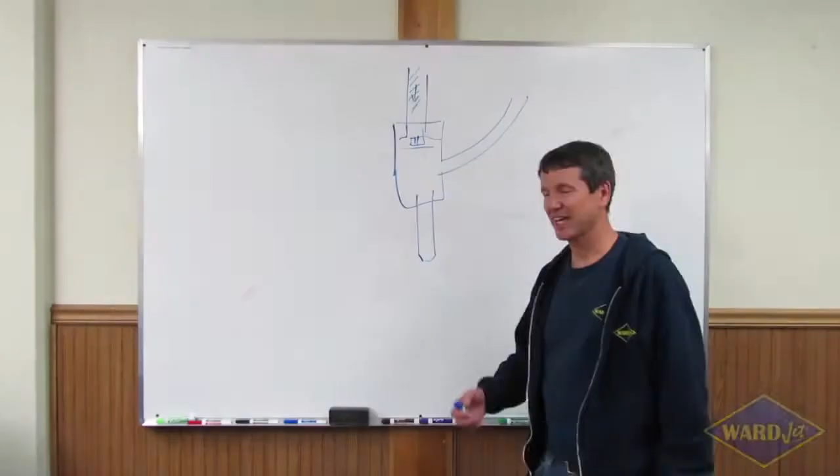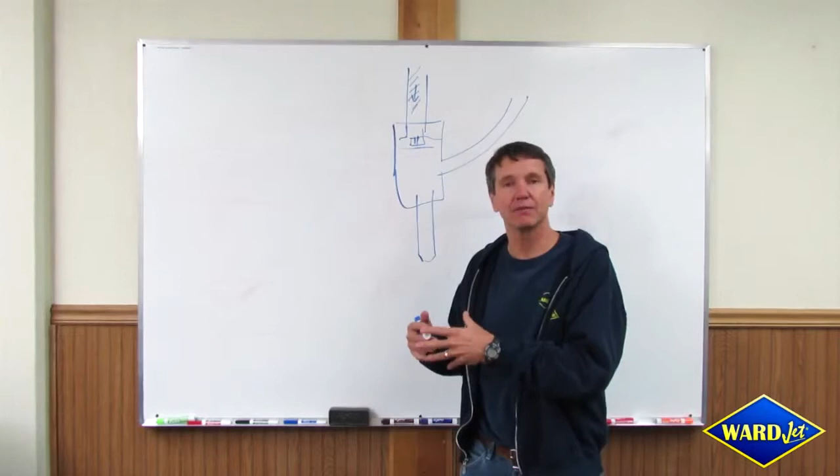Okay, we're going to talk a little bit more about the mechanism of how the water jet cutting head works. As long as you understand that, you'll hopefully have a better idea and feel for what's going on while you pierce, and why you're getting blowouts, how to try to address them, and what could be the cause.

Okay, rough picture. Here's your cutting head, your nozzle. We've got the abrasive coming in, we've got the high pressure water coming down here. The process is the water comes through, comes up against an orifice, and comes out as a stream of water that travels straight out the nozzle, at 2200 miles an hour.

Depending on what style cutting head you have, there might be some kind of wear chamber in here, so that you wear away the chamber as opposed to wearing away the whole body. All the water jet cutting heads typically have a wear chamber inside them, a wear insert.

You've got your abrasive coming down here, and the way it gets drawn in is a process. The first thing is you turn your water on. The water comes up against the orifice, it's forced through the orifice at 2200 miles an hour and goes shooting out the nozzle. That's your pure water only.

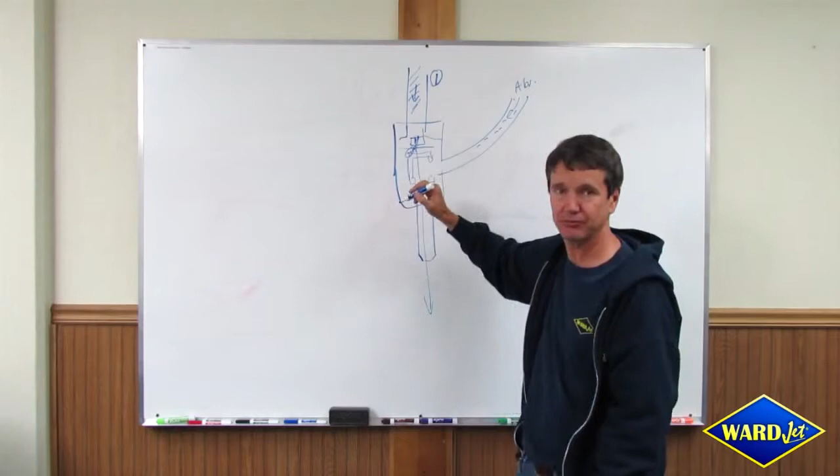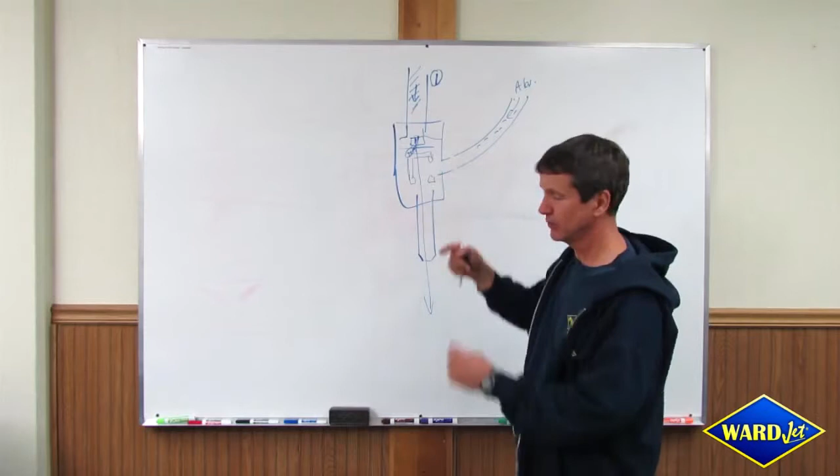As it comes out here, by the Venturi effect, it creates a vacuum. So if you took the abrasive tube off and put your finger on here, you should feel a strong pull of the vacuum trying to suck your finger, and when you take it off there'll be a little white mark there. So you can always test the quality of your orifice and nozzle by simply putting your finger on there.

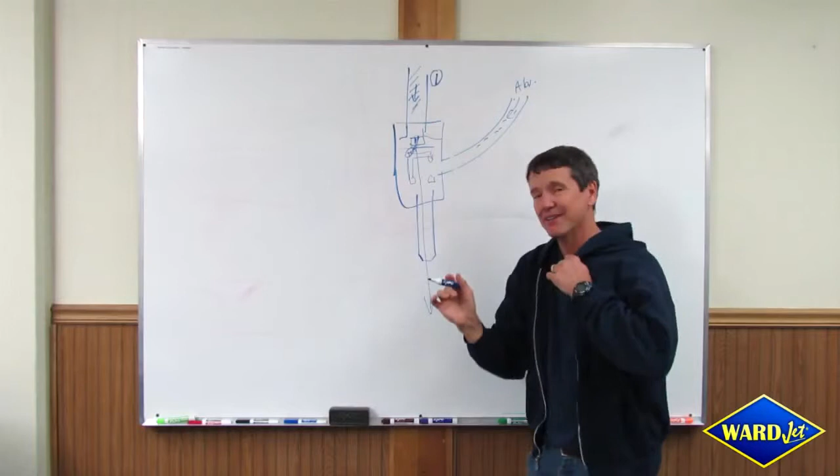We rely on that vacuum to efficiently remove the abrasive and draw it into the stream, mix it up, and take it out through the cutting head.

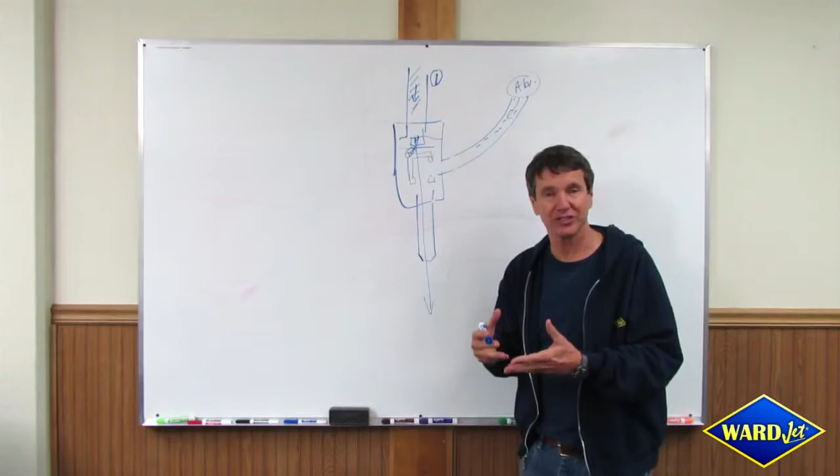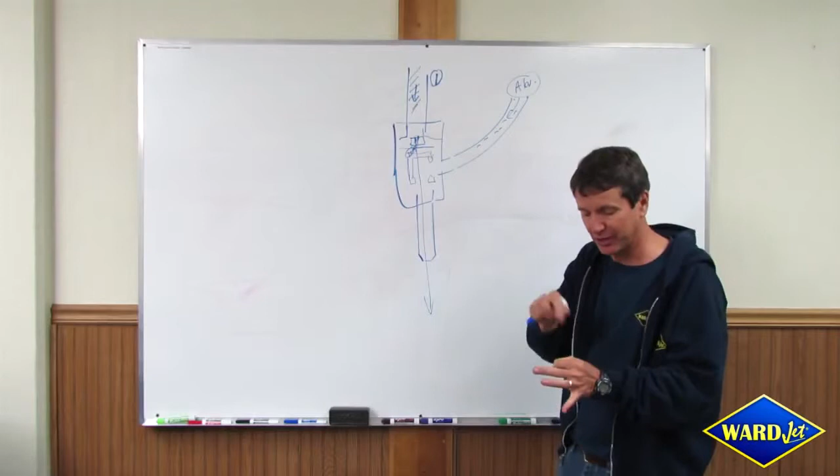Let's just flip to the abrasive side. The abrasive is typically dropped into this tube by gravity or some form. Gravity is the most consistent, but even water jets have different style mini hoppers, some with just a valve that opens, and depending on the opening and aperture you have, more or less abrasive falls out and drops into a tube.

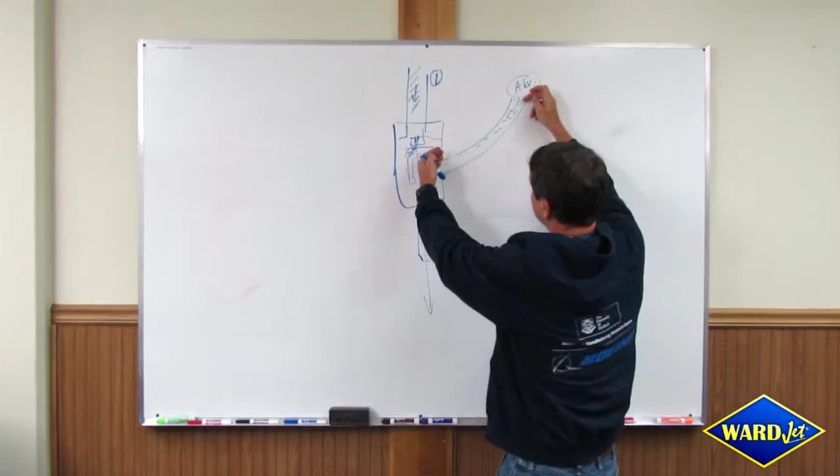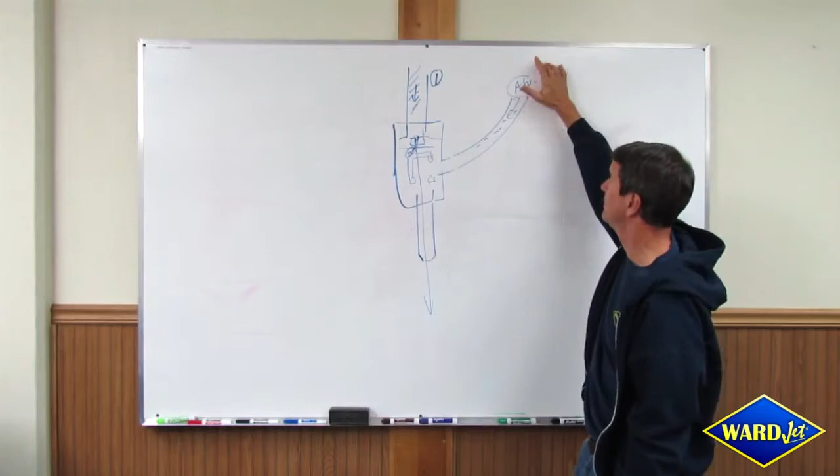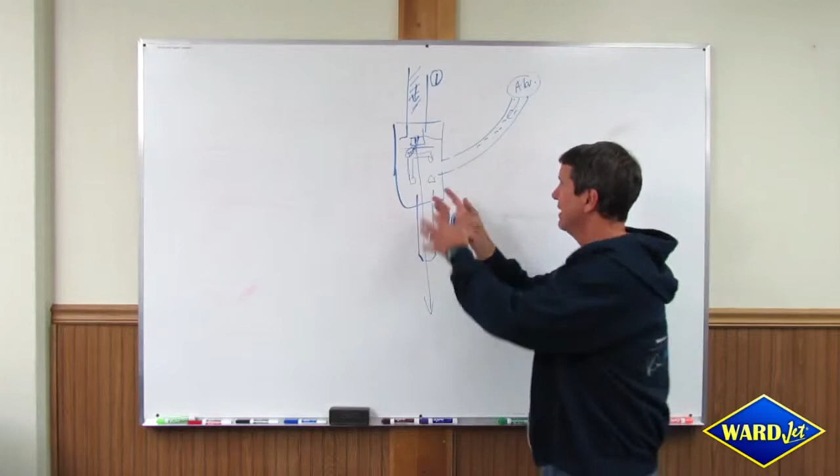It's going to run down this tube, encouraged by the vacuum that is drawing it away. But the vacuum should only draw and consume as much abrasive as you're dropping in. If you put too much abrasive in here, the water is not going to be able to take all the abrasive away and absorb it into the stream, and as a result the abrasive starts to clog back up here.

If you don't have enough abrasive coming down, then of course you're not cutting at maximum power. Your cutting power with abrasive water jet cutting is determined by having the right amount of abrasive.

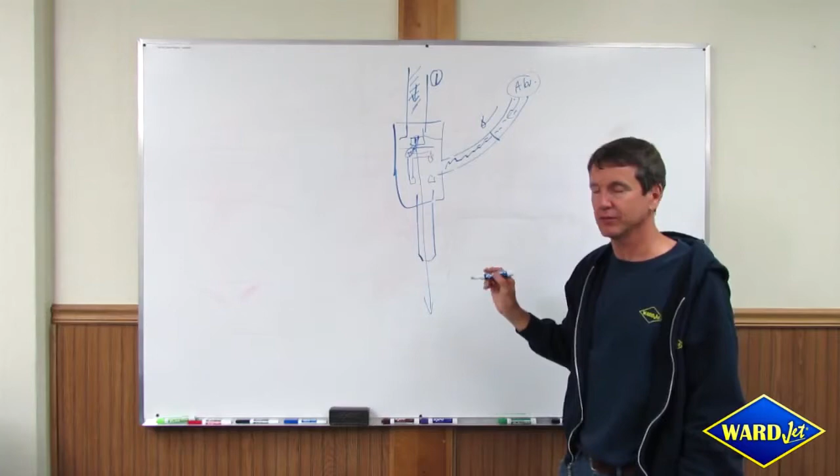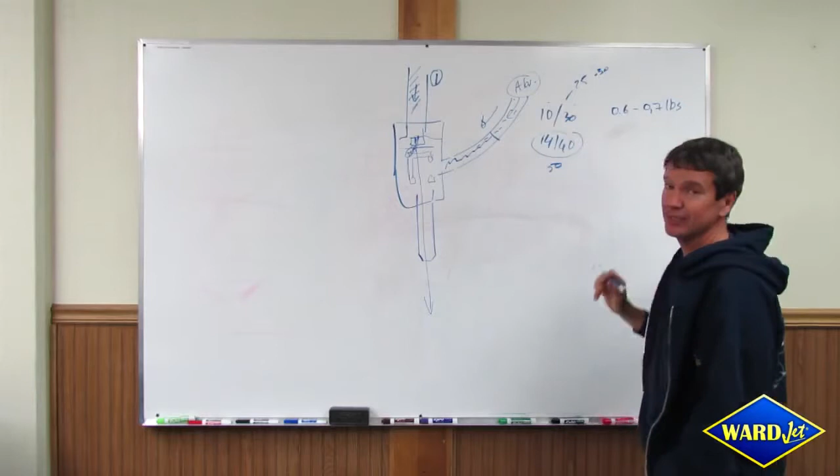If you're running a 10-30 orifice nozzle combination, you typically want about 0.6 to 0.7 pounds per minute of abrasive. If you're running a 14-40 orifice nozzle combination, this would be a 25 horsepower pump, or 30, you could actually get away with more. A 14-40 would be a 50 horsepower pump. This could be two heads, each running the equivalent of 25.

And here you're going to be more at about 1.2 to 1.4 pounds of abrasive. You can see, almost double. But you can cut at about twice the cutting speed with a 14-40 as you can over a 10-30.

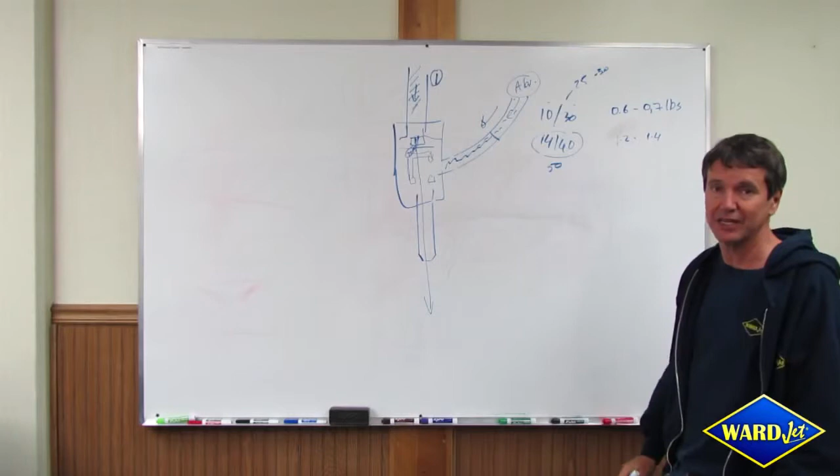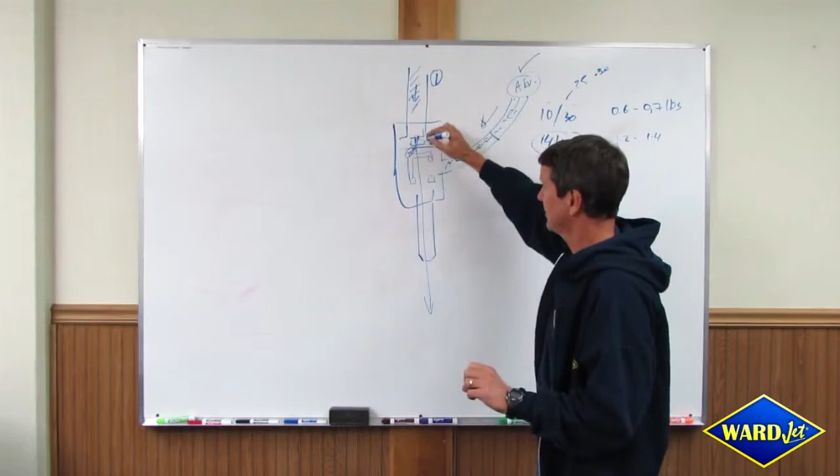So just getting back to here, presume that we've got the optimum amount of abrasive coming in, you've got your water coming down here. Just going back to where we were, it's a step-by-step process: Step 1, water pressurizes up against the orifice. Step 2, it's forced through the orifice. Step 3, it creates a vacuum.

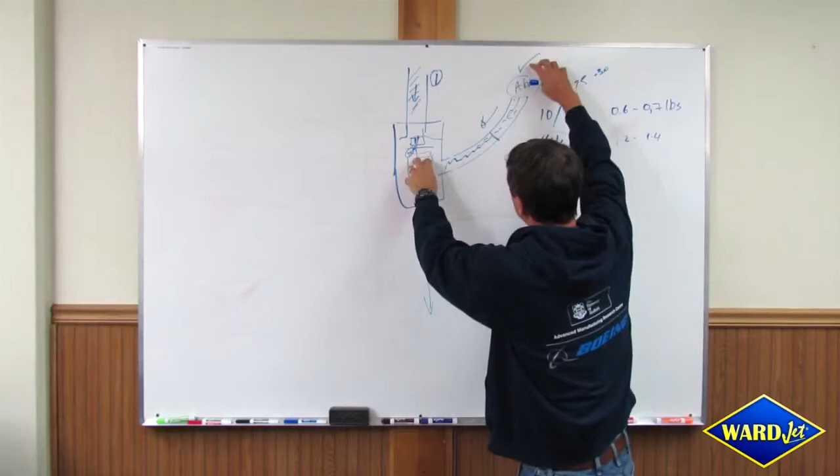That vacuum then draws the abrasive into the stream, and then it comes out. Now, the problem we have with stone.

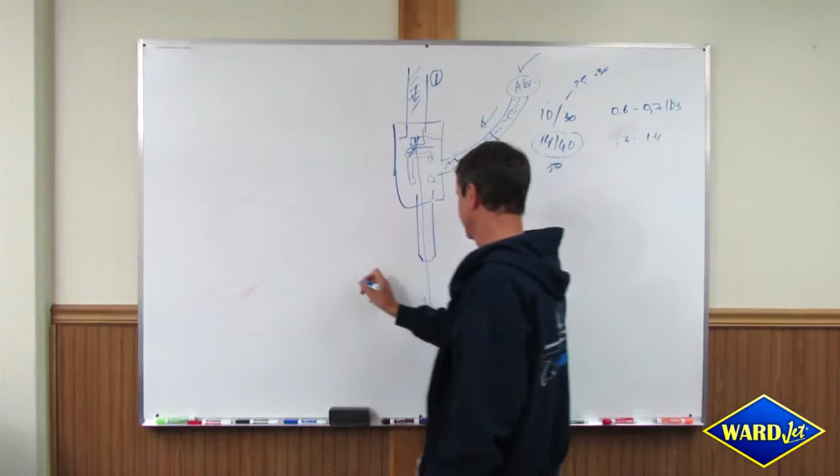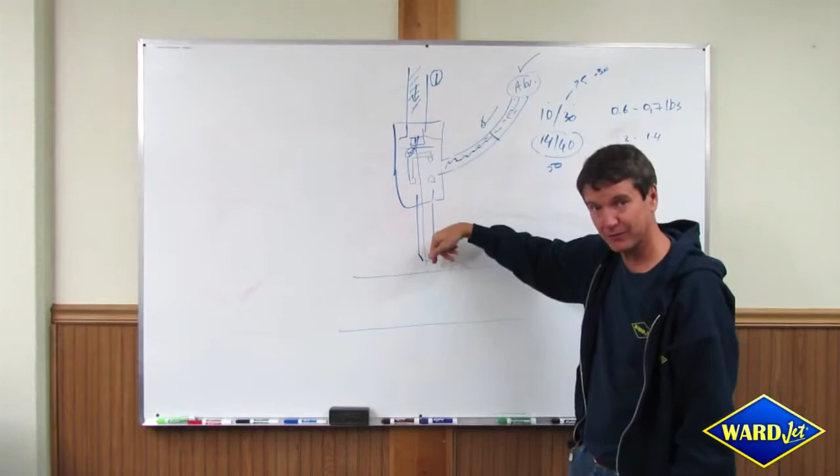If we were cutting steel, we wouldn't even have to have this discussion, because with steel you can hit the water. Remember, the water comes out first. You can hit the steel with water and it just sprays out and does absolutely nothing.

If you take your water jet, and I suggest you take some different kinds of stone, and with water only you jog your head over, and at full pressure just turn it on straight over the stone and watch what happens. You will blow it to pieces, to different degrees depending on what marble or granite.

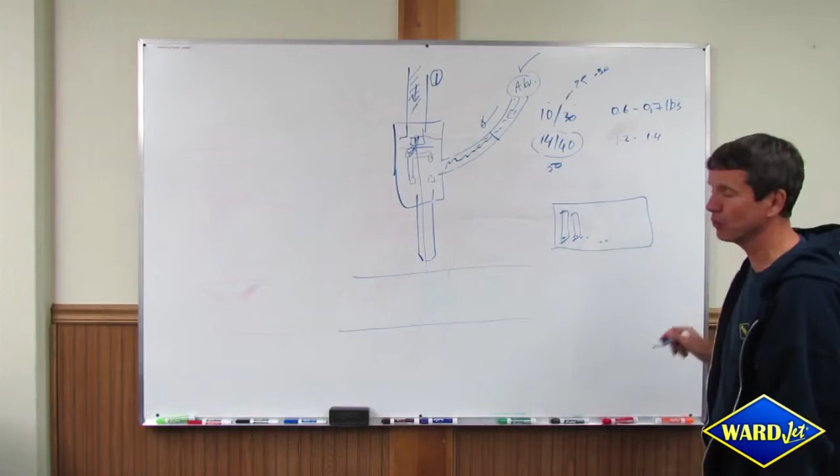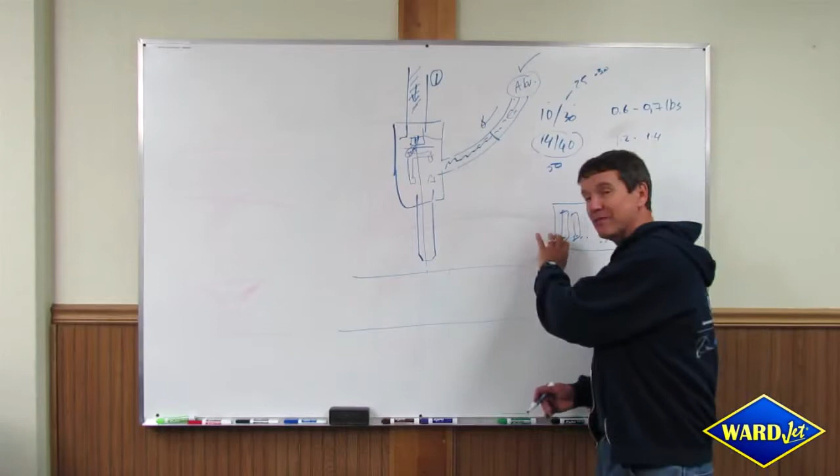If it's a travertine, it's not going to be so bad. If it's some kind of granite, it will just shatter it to pieces. Worth doing it. Make sure you're wearing safety glasses, because you're traveling at 2,200 miles an hour. But that's what's going to happen.

If in the process of switching this on, it's going to go step 1, 2, 3, it's going to shoot the water out here. The water will hit the stone first, and it will just shatter the stone to pieces in a localized area.

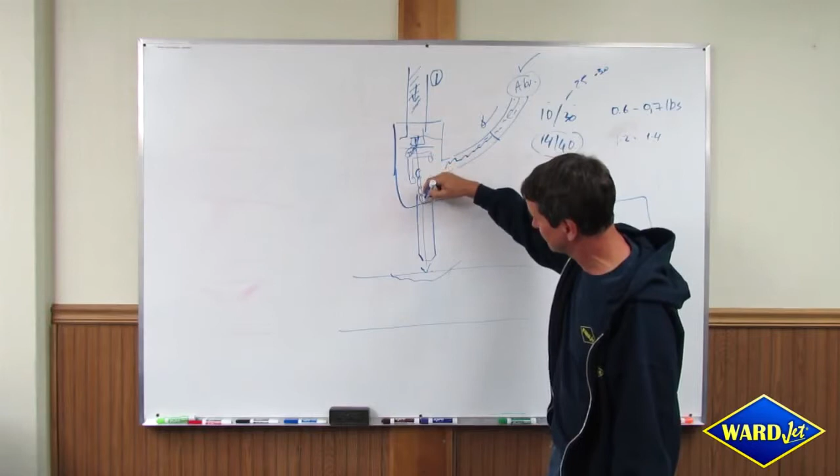Only when the abrasive is mixed up with the stream does it actually have an abrasive eroding power, so that mixture of water and abrasive starts to dig through here, as opposed to just destroying it and tearing it to pieces with water only. So we must have abrasive plus water.

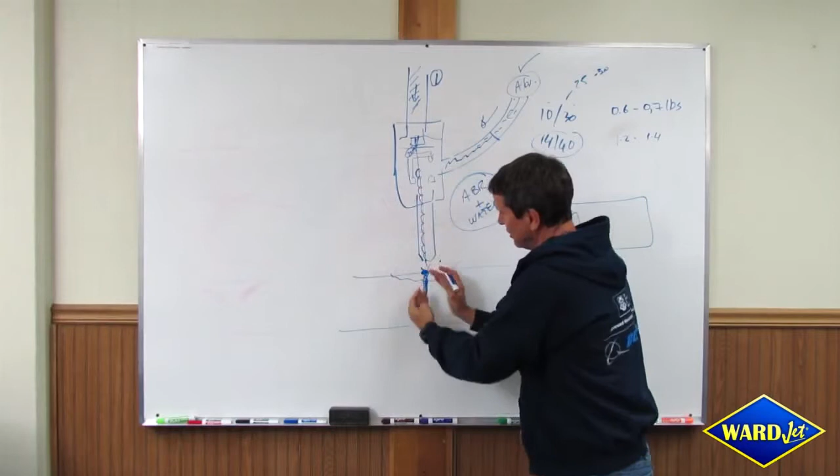We've almost got to have that mixture completely as cohesive as possible, so that we get true cutting power. The challenge being, how do you get the abrasive in here when the first thing that has to happen is the water has to come out?

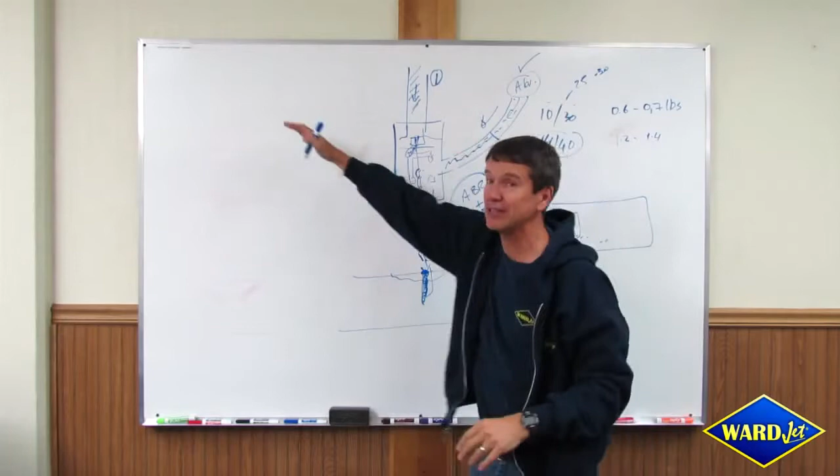Now, there are different ways of talking about this. There's things called vacuum assist by some other people, where they'll have another tube here and they suck a vacuum, and then they draw the abrasive across first, and then when the abrasive is flowing, then they turn the water on, so the water has to go through the abrasive. That can be offered by multiple companies. It's easy to, you can buy parts that do that for you.

But generally, and let me just complicate this one little bit more, okay? Let's talk about switching off, all right? Let's say that you can get the abrasive in there and you are cutting.

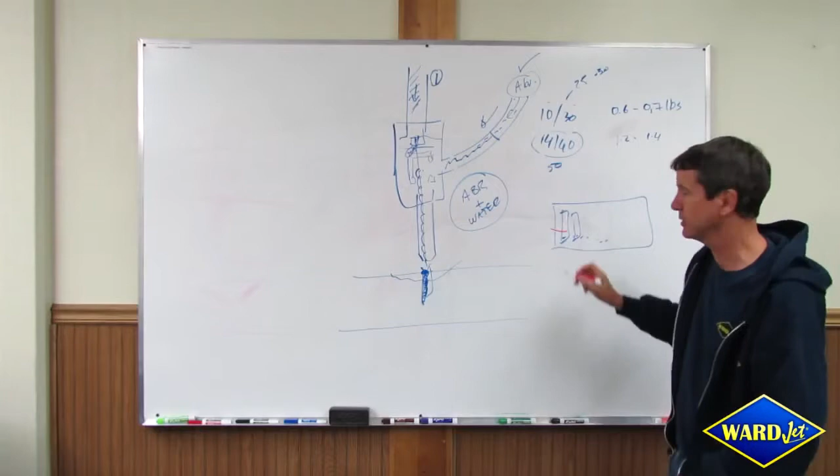In other words, you pierce off the material, you allow that to happen where you're not on the stone, you've got the power, now you start to come in and you start cutting. Well, of course, you've got a cohesive abrasive water stream, and it cuts through and does a great job. Let's say that's all happening, and now you switch it off.

Well, one of the things that happens with the water jet cutting head is you never want your abrasive to get wet. Never. Humidity can cause problems.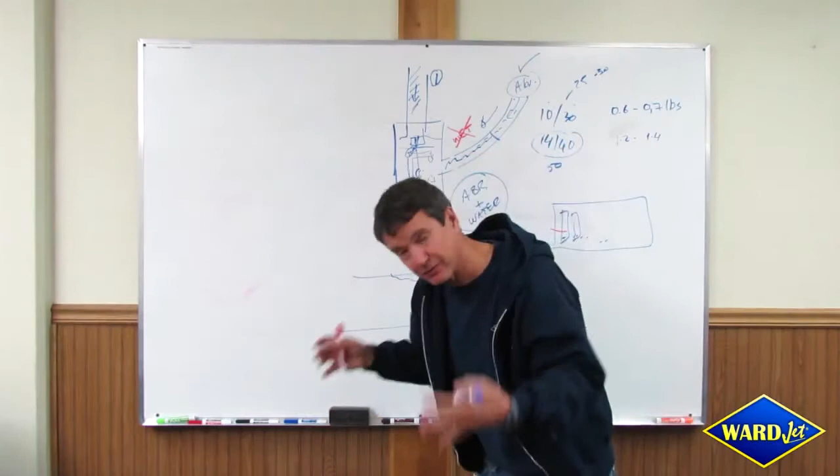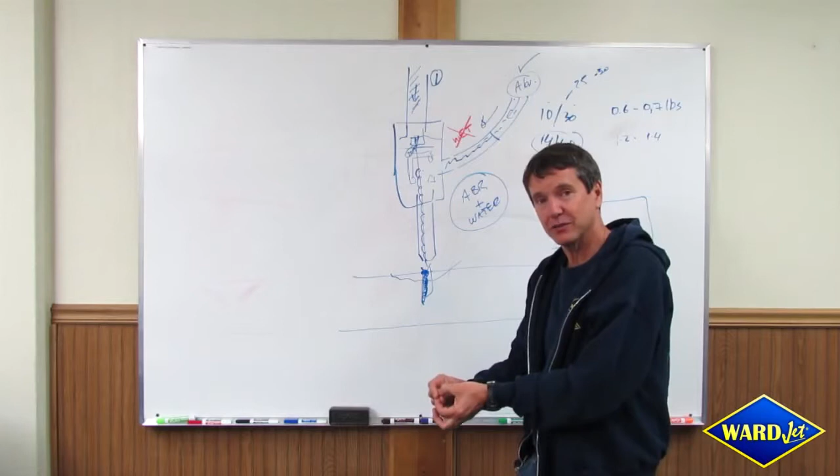If you're loading a bag of abrasive into your bulk feed hopper and it's a hot day and a bead of sweat drops into that bag, it will glue the few pieces of abrasive, grains of abrasive together. They will find their way into the bulk feed hopper, they will stay together, they will come through the mini hopper, and they could get stuck.

If they don't get stuck, they might get through here, and you suddenly land up - I know it sounds impossible and I don't understand it - but you land up with 3 grains of abrasive stuck together, and as the water goes down there, it lodges them against each other. Bam!

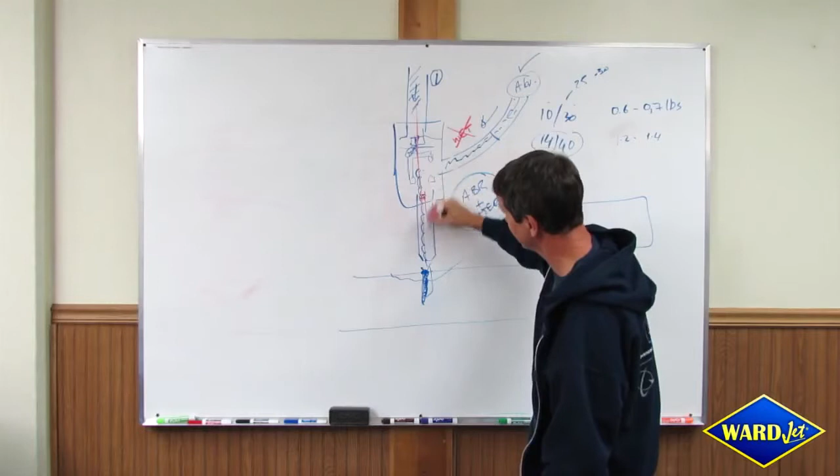You get a blockage, and all this water, instead of coming out here, gets pumped and shoves it straight up the abrasive line, and depending on what you have, it'll go straight into your mini hopper. Now, we have something called an anti-backflow device that is specifically designed to address this.

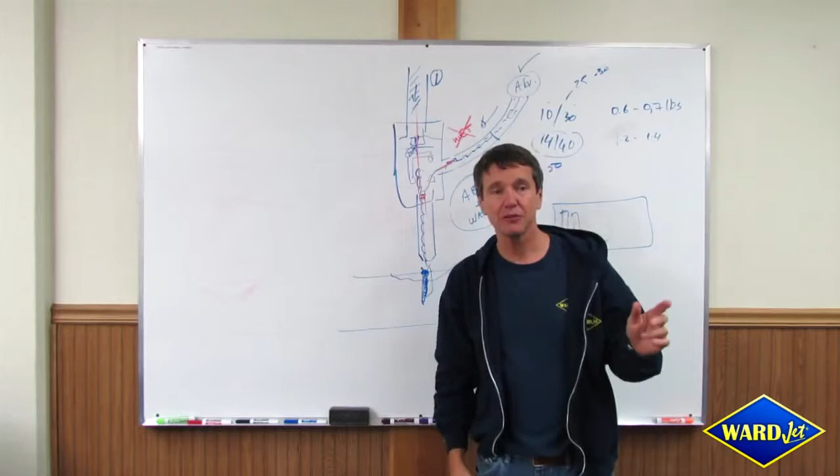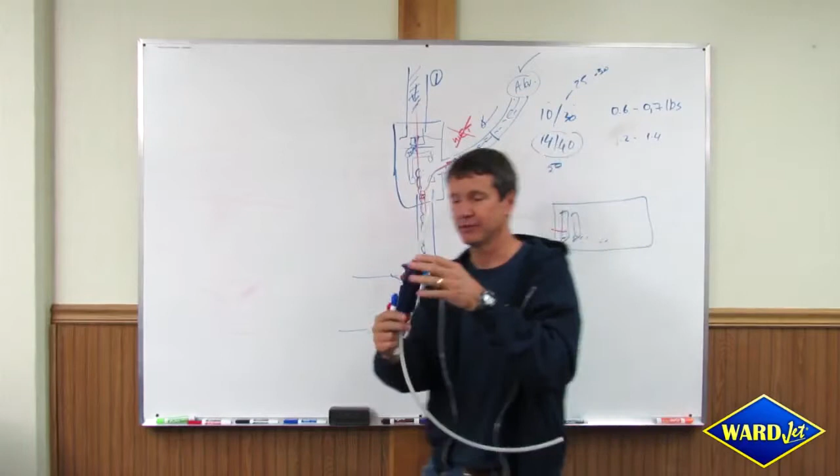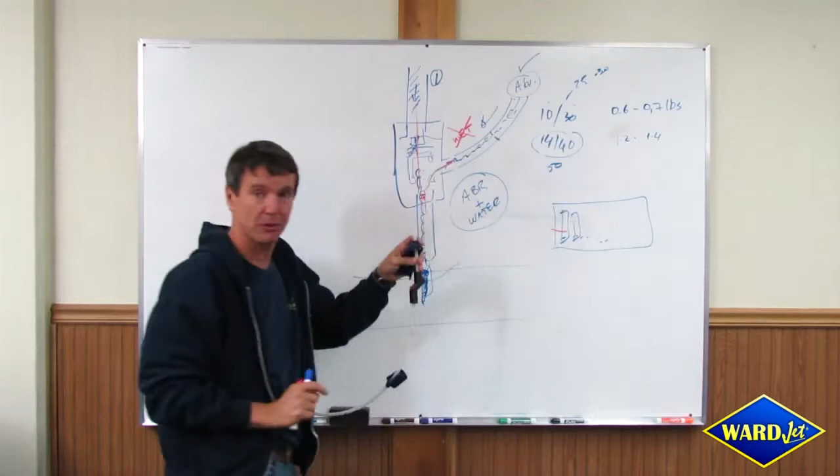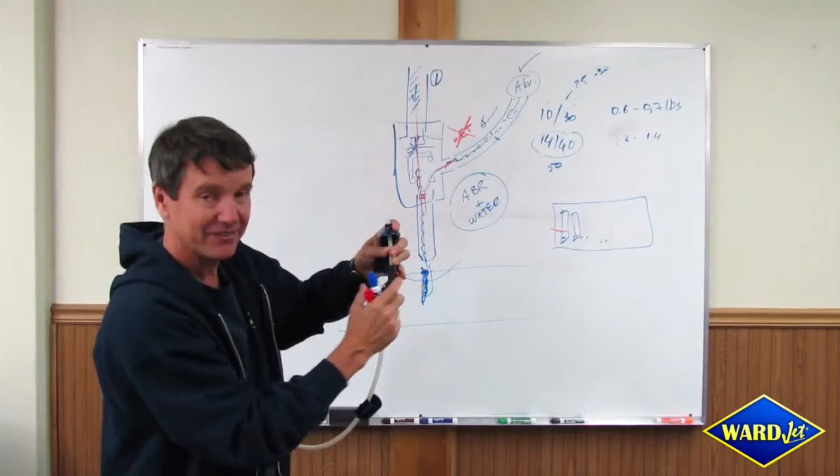From the outside it looks like this, but from the inside, on a cutaway, this is the hose that would go to the abrasive, to the mini hopper, and this is the hose at the cutting head. We have these little flaps, so should you get a blockage and the water is shoved back up this pipe, it comes straight back up here and sprays out, it gets diverted and sprays out, and the intention is that the chance of water continuing to get back up into the actual mini hopper is very slim to none.

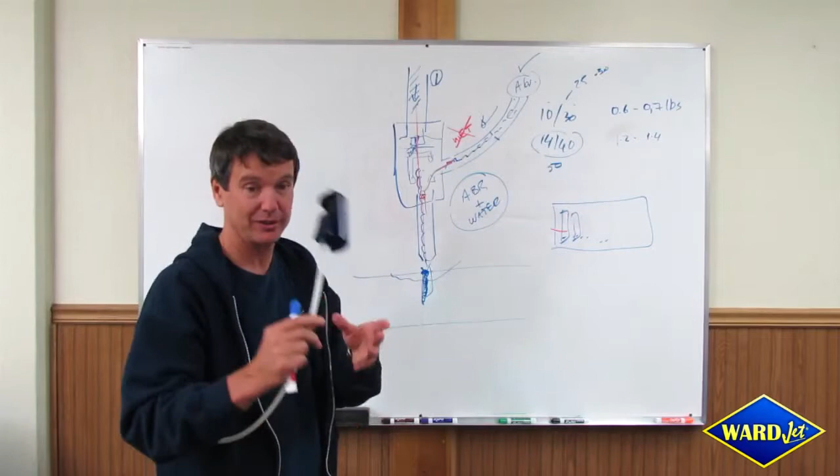If you don't have one of these, I suggest you get one. They are worth their weight in gold as far as addressing things like this. So we never want the abrasive to get wet or moist, even humidity can be an issue.

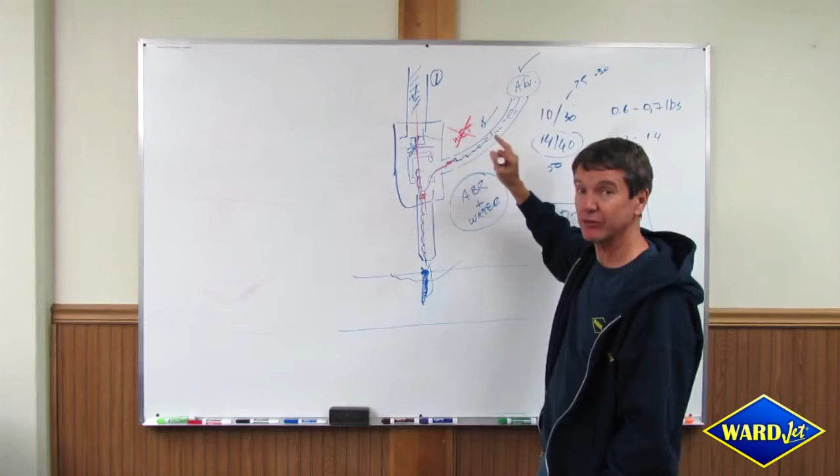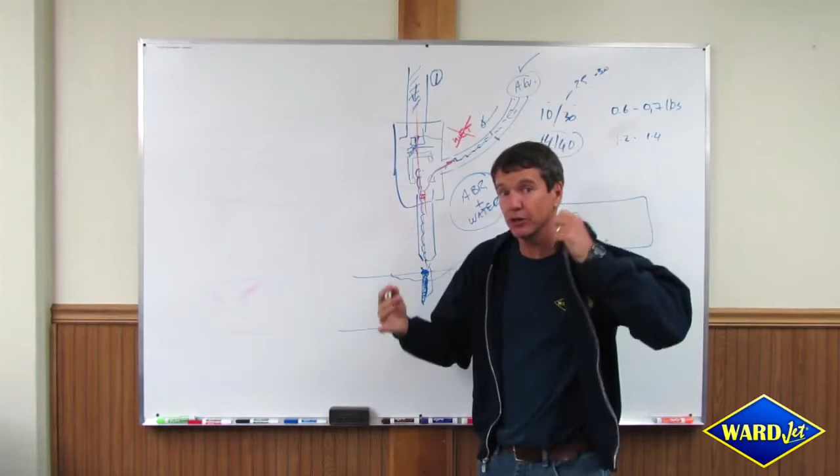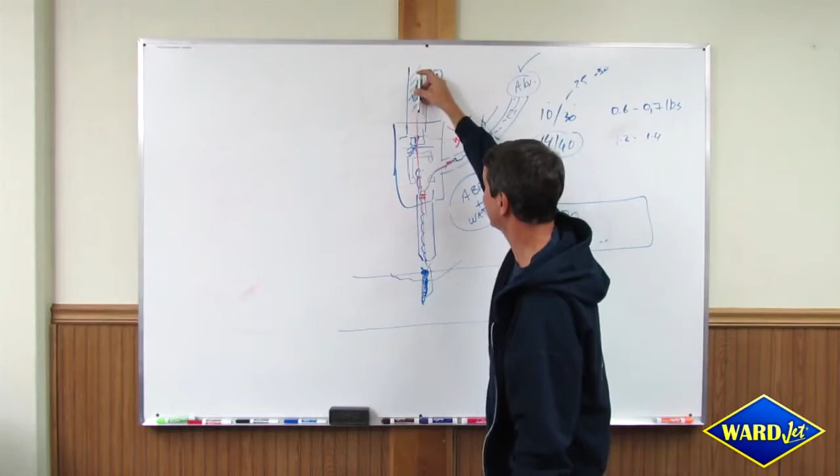But here comes the next challenge. When you switch your cutting head off, we go through a process, just like when we switched it on. What happens is when you switch the water off, it's almost as if there's a solid iron rod of water, and that last piece of water under pressure gets forced out through the cutting head.

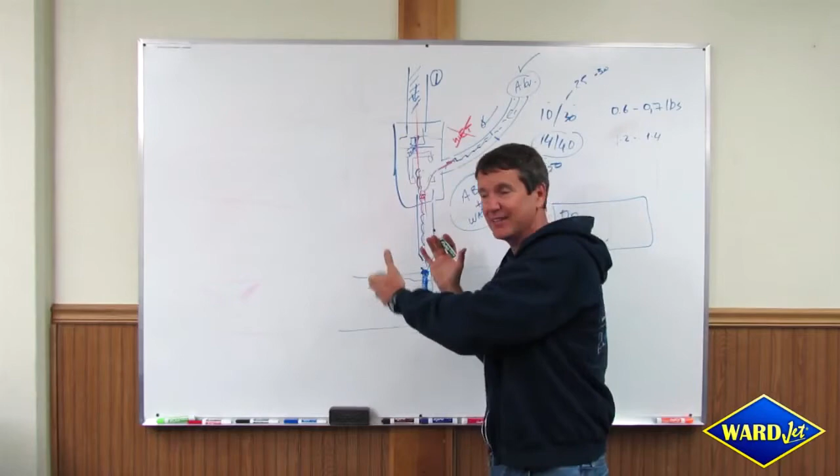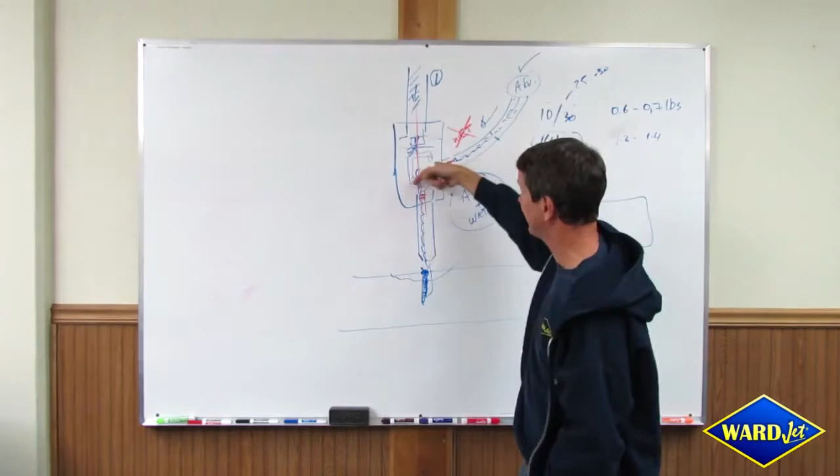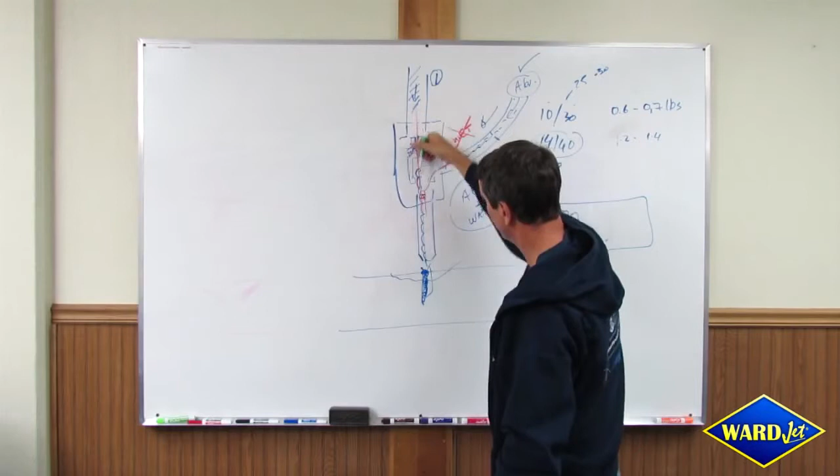As it leaves the cutting head, it leaves a vacuum behind it. On old systems, we used to actually pump air down here, so when you switched this off, the air on the solenoid got diverted and pumped down here so we'd pressurize it and not get all the air rushing back in and damaging parts inside. Then if you just switch this off, your rod of water comes out and the air comes back in here at, let's presume, 2,200 miles an hour, and it fills this void as quick as that.

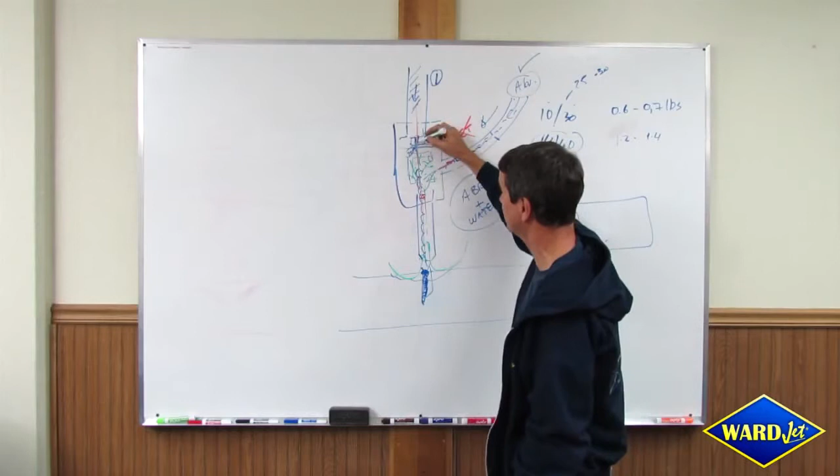If you have abrasive all around here, that abrasive gets slammed against every part of the inside of the cutting head, and depending on the design of the orifice relative to the chamber—a lot of cutting heads don't even have this chamber—some abrasive could get up and hit the bottom of your orifice, chip it, and break it. You switch your head off, and it's done with the abrasive in here.

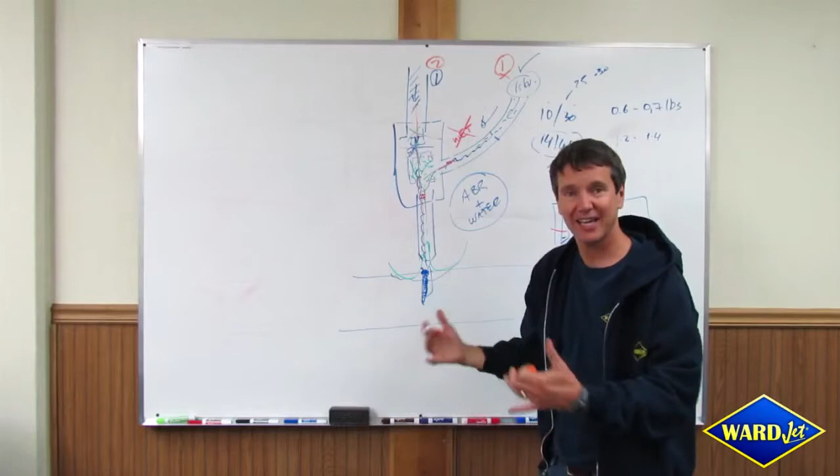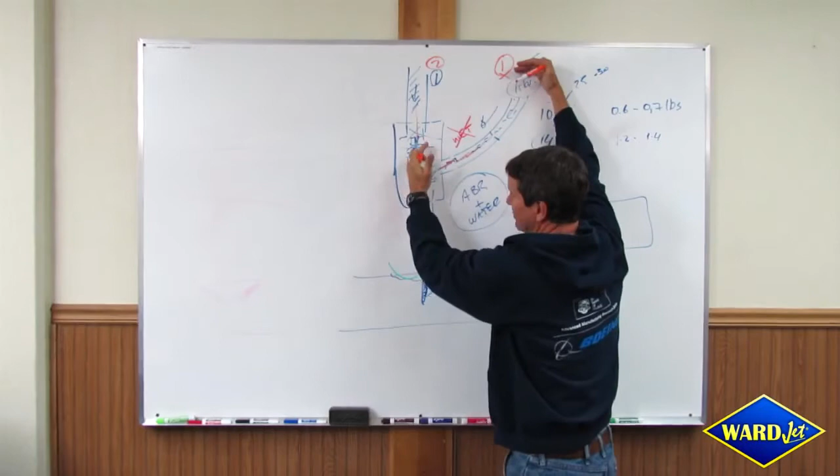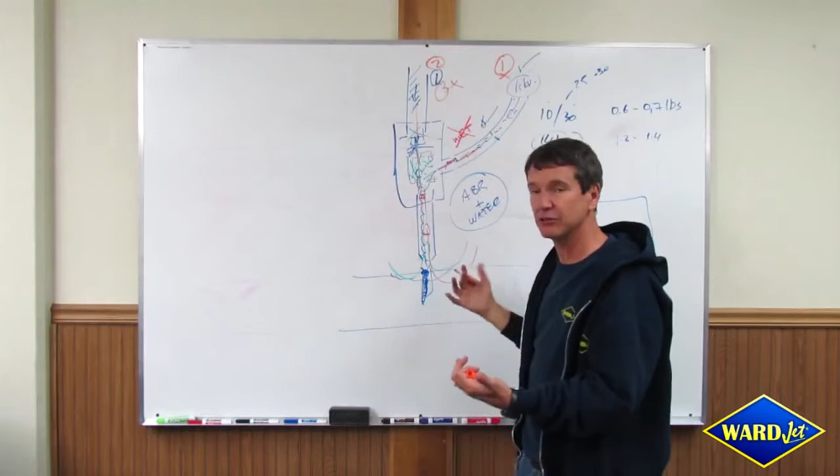So what we typically like to do is go through a process called purging the system of abrasive. The ideal way to switch the cutting head off: first, switch the abrasive off. Second, let the water run for a second, half a second, quarter of a second, whatever. That water continues running, the vacuum continues to draw all the remaining abrasive out of the system, so this is now void, no abrasive inside. Third, you switch the water off, the air comes back up here, there's no abrasive to throw around and damage everything, and as a result, your orifice will tend to last a lot longer.

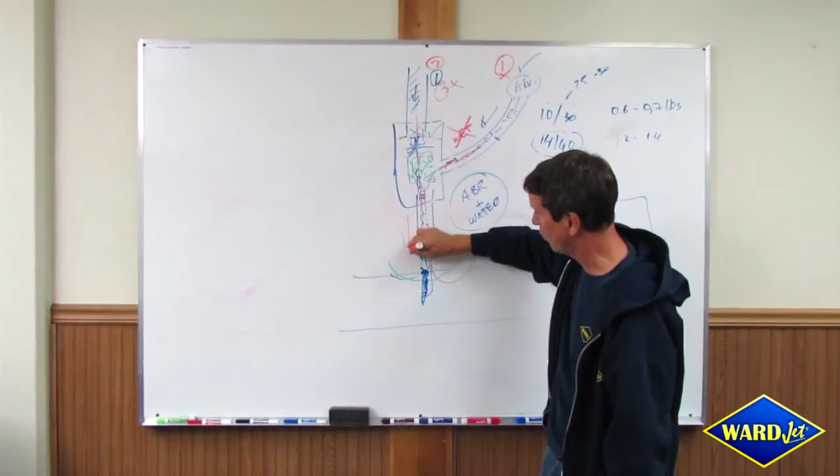So that's a typical switching off cycle. We've gone through the switching on cycle. We have a major problem: when you come to switch on again, there's no abrasive here, and with no abrasive, you are going to get water coming down, and that water is going to, by itself, damage the top of your stone. So, in the next session, we'll discuss how you get around this.